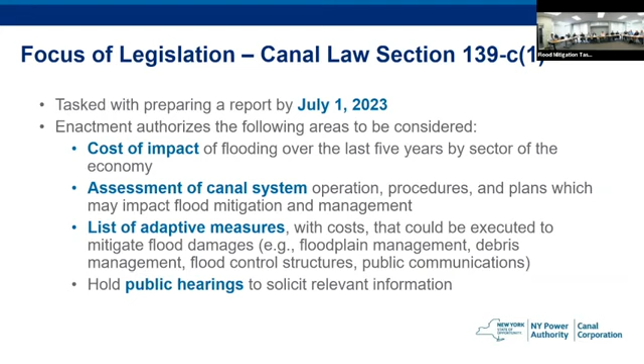It is important that we know the task force has limitations. We can provide recommendations, but the state of New York does not have authority over other water management authorities or municipalities. Very important to know.

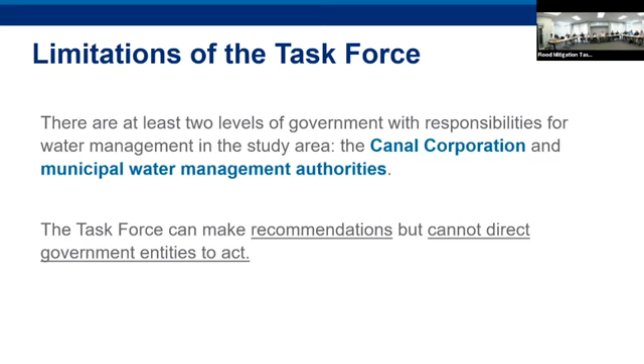Next slide, please. The scope of the focus will include two extremely large watersheds outlined here: the Mohawk River Basin on the right and the Oswego River Basin on the left.

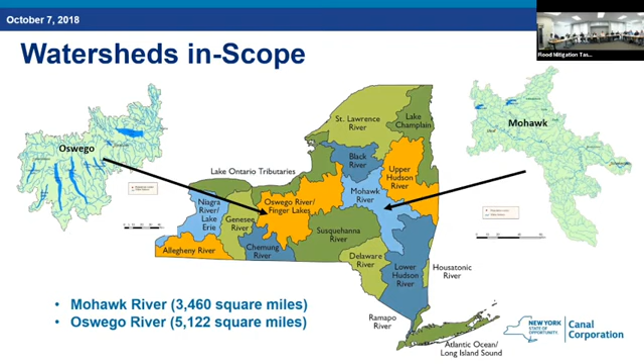Going back to our site visits from this morning, our tour bus led us to four important locations along the Oswego River Basin. I think we want to go to the next slide, Rob.

So you see that's the path we took. We convened at approximately 9 a.m., got on the bus and went from our first stop at the Syracuse office off to the Caughdenoy Dam, then to Lock E-24 along the Erie Canal in Baldwinsville, to the Cross Lake Inn and Marina, and then on to the Cayuga Seneca Canal, Cayuga Seneca Canal Lock 1, each of which have individual water control structures important to the task at hand as we begin to examine the Oswego River Basin.

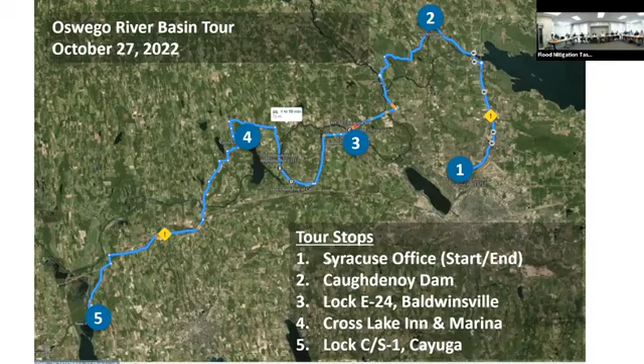I would like to now turn things over to Howard Goebel, our chief hydrologist and subcommittee task force chair. Howard is going to lead us through our four stops and the dynamics there.

Thanks, Director Stratton. I'm going to give a summary of our bus tour today. It was very useful to put eyes and boots on the ground to actually see some of the water control infrastructure and some of the limitations in water management and flood mitigation that exist throughout the Oswego River Basin.

So we started off with the Caughdenoy Dam. It's a series of 7 tainter gates aligned across the Oneida River, each 50 feet wide. It was constructed in 1951 to replace a fixed crest dam that was found to be hydraulically limiting and causing flooding on the upstream Oneida Lake.

This is the current operation now, 71 years later. The Canal Corporation uses these gates to regulate water levels on Oneida Lake between April 1st, or after the spring freshet, through December 1st. On December 1st, the gates are fully opened.

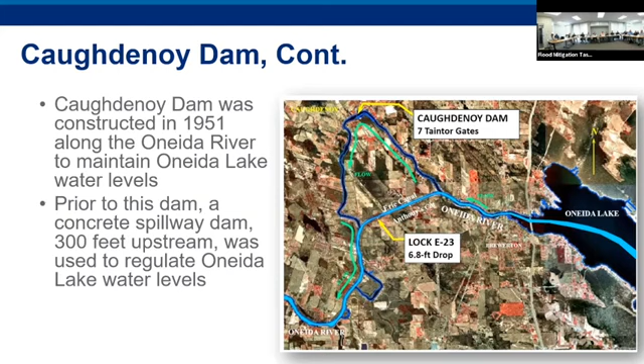During my 22-year tenure, this has been the driest year—the first year in my tenure that we never had to close a dam or canal for a high water event. So that was a marked positive. But we're at the mercy of Mother Nature, and we take the good with the bad.

Moving over to Lock 24 in Baldwinsville, right in the downtown. The Seneca River traverses Baldwinsville, and this dam, hard to see here, but in the center of the picture, was built to create a navigation pool from the lower level of the Seneca River to the upstream level and canalize the river. The dam serves as a flow control device, and when water levels can't be maintained using that long spillway, there are tainter gates and hydropower companies used to regulate water levels. The navigation lock is used for one purpose, navigating boats, essentially a water elevator. It has no flow control opportunities.

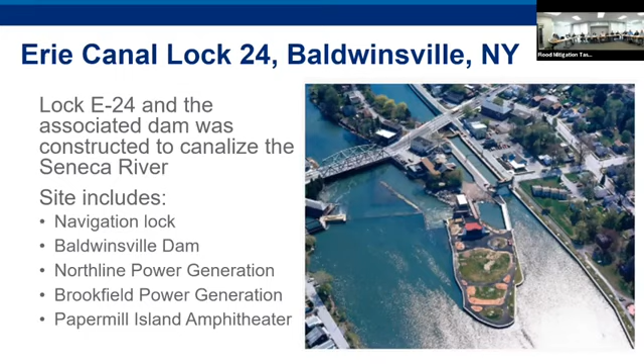Taking a different perspective of the layout here from the aerial photo. The Canal Corporation has a tainter gate built into the dam, used to maintain water levels on the upstream side in concert with Brookfield and Northline power generation facilities on the north and south side. They're required to maintain the water level at the crest of the dam, but during high flows the water level does rise and spill over while they're generating. So there are essentially five separate water regulating devices here: Canal Corporation's tainter gates, two at Brookfield, and two at Northline, used to regulate water levels.

That 10-foot rise in water level from the lower end of the lock to the upper level is really why this whole structure was built. It was pretty evident today during the bus tour—we talked a lot about the hydraulic restriction of the waterways, and the Seneca River certainly has some hydraulic restrictions to it. This dam is part of that restriction.

Moving on upstream to Cross Lake, to give a lay of the land of how flows here generally move from west to east, left to right. Water flows into Cross Lake, which is just a widening of the Seneca River. It's not regulated—no dam is creating this other than the dam down in Baldwinsville.

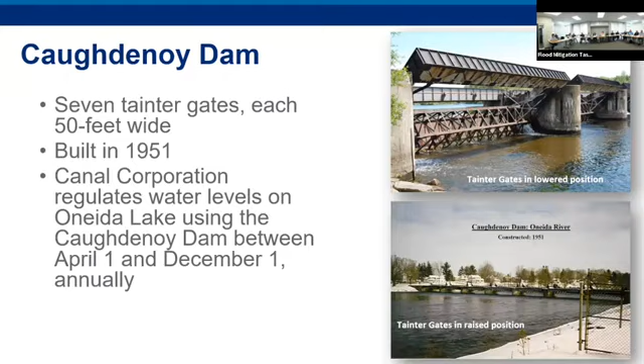When we go to Baldwinsville, here we're looking at putting a bladder dam across that long Baldwinsville Dam and allowing for flows to be released. You want to explain what a bladder dam is for people that may not know? Sure, a bladder dam is similar to a tainter gate, but instead of raising it out of the water through either hydraulic or pneumatic control, the bladder would be lowered so that water would flow over it and allow it to flow downstream in a more or less unobstructed fashion.

We just, during the bus tour, did discuss water level rises sharply on the downstream side of this dam as well, so there are restrictions downstream. It's not as simple as just opening the floodgates per se and not causing any issues - we need to minimize not only flood damages upstream, but make sure we're not incurring any flood damages downstream as well.

So I think that'll be part of the first question: the bladder dam would impact water flowing down the Seneca River to what body? Where would the flood mitigation impact be? Making upstream adjustments here, from this all the way upstream to Lock C/S-1, essentially we change the hydraulic gradient.

So it's a fixed crest dam. The water either flows over the dam during a flood flow, the powerhouses are in full operation, the tainter gate's fully open. Last year I went and looked - the tainter gate of Baldwinsville Dam, the Canal Corporation, was opened on the 17th of October. It wasn't closed until sometime in February. So again, the river was controlling itself.

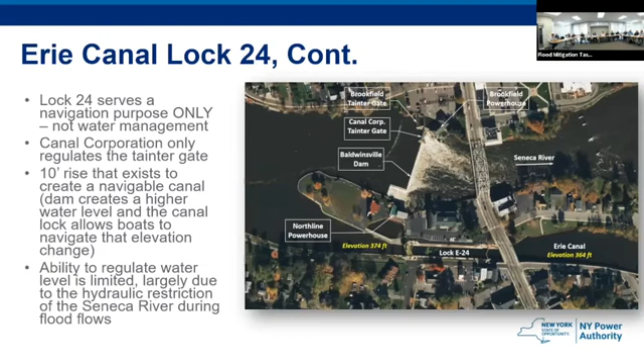Cross Lake here is a challenge - a lot of homes and properties that are in the floodplain, and definitely when that water level rises it definitely shows some issues. That throttling device of the Cold Street Dam certainly isn't something that was built intentionally. That's something that was created after the fact, and is a hydraulic obstruction that exists.

So if it were to be potentially expanded to let more water downstream and increase the hydraulics through there, likewise you can't do it in a way that's going to flood the areas immediately and all the way downstream until it becomes a non-issue.

You mean the state ditch, right? Right, I'm sorry, yes. So the state ditch is a straight line rock cut, almost a straight line. We saw that today from the bus. It's relatively narrow. It was built at the time for the hydrology at the time.

One of the considerations might be to look whether modifications might need to be made to the state ditch cut, right? Yeah, good point, Brian. I mean, let's face it - what's changed since then? We've had certainly increased development throughout the watershed in the last 100+ years, no doubt.

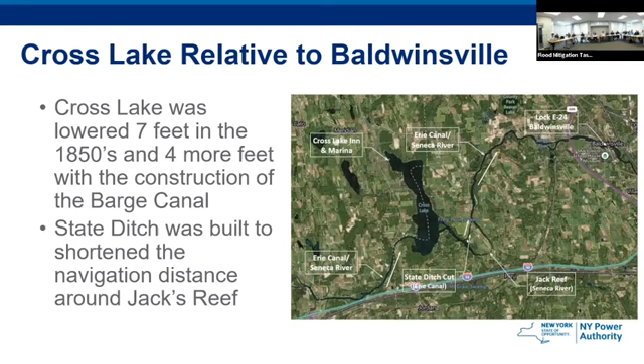Right. So everything exists in its own dynamic equilibrium, and we're going to study in the hydrology and engineering subcommittee what some of our limitations are and what the recommendations for future work are in our report. That helps a lot. And then on to C/S-1.

Same thing here. We're just looking at really how Cayuga Lake water levels are managed. We're maintaining at 383.5 right now in the summer. We have certain drawdown periods in the winter. Are those appropriate, or are there potential modifications to these rule curves and lake levels that could minimize the flooding conditions downstream?

The channel downstream has a finite capacity. And obviously, if you open up some of these hydraulic obstructions we talked about downstream, it would benefit this. But a further study would really look at and explore what the real benefits would be, and also what the consequences of having lower lake levels would be, because there are consequences to using the lakes more as a reservoir for storage rather than operating normally.

Not just Cayuga Lake, but all the finger lakes. Canal Corporation regulates Cayuga Lake, and the rest are all run by municipal entities, with the exception of Seneca Lake, which is operated by a hydropower company.

So that is the overview of the water control dynamics of those four locations. And now it may be appropriate to call on members of the task force if they want to add to this conversation on any one or all of the four, and ask questions of Howard.

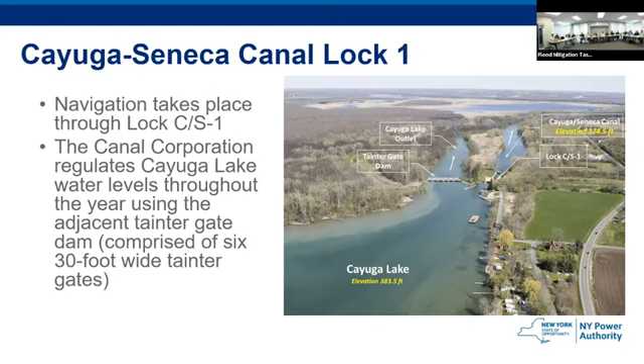Howard, I'm curious, does your agency or any other agency have records of flow through any of your gates, whether instantaneous or daily average? When I look at the rule curves, I can see water levels in the lakes or in the river. I'm curious if I could overlay discharge.

Yeah, what I was going to do was put a secondary axis, get rid of the precipitation on the secondary axis on this slide, and put flow instead, which would be very telling. There's a USGS gauge downstream, right about where we turn down to Route 20. There's a bridge there, and there's a USGS gauge on that bridge.

But prior to that gauge going in, probably five or six years ago, we calculated discharge using a theoretical discharge based on upstream and downstream elevations and the opening of the control gates, which is certainly a useful first order approximation for what you're asking. So we're not doing this blindly.

The gate changes we're making are really flow based. And we know from a flow based standpoint, from doing this long enough, what the corresponding downstream water levels are. So we're not just flippantly opening gates. We're changing gate openings to achieve desired release rates that result in corresponding water levels downstream.

Okay, the gauge is nice because it updates every 15 minutes.

So I think it's very choppy. I wouldn't need the instantaneous because these look like they're probably daily average, right? This is an 8 a.m. reading every day.

Yeah, so if that were something that... Oh sure, I have all that data at my fingertips, from 1982 to present. And I'm not asking this to put a burden on you, but there are graphs also for the other control points that you were looking at, the four that we went through. You probably don't have anything for the state ditch, but at Baldwinsville...

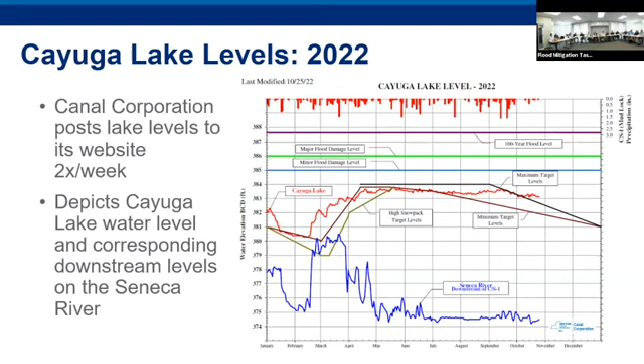So no one exists in grand isolation here. There's a lot known - it's easy to do an after-action forensics to see what's going on. So we're going to get into your subcommittee and the other two that we're going to form, but you bring up a very good point, and it's something I said in our opening comments: no one agency is going to be responsible for forming solutions. There are individual water authorities, individual stakeholders, and it's going to be a collective solution.

Also, I think, Howard, part of your group will also be looking at the reaction that happens. Making one solution or one change of one water control device may alleviate something there, but it would impact someone else. So for every action, there's an equal and opposite reaction, and the reaction is often in the form of sending water from one place to the other. So we have to look at that carefully, and determine what works best for the group as a whole. Those are complex situations that we're going to get into.

Other members of the task force, Robbie, anything that you'd like to chime in on screen, please feel free to. We can't see you, but please speak up.